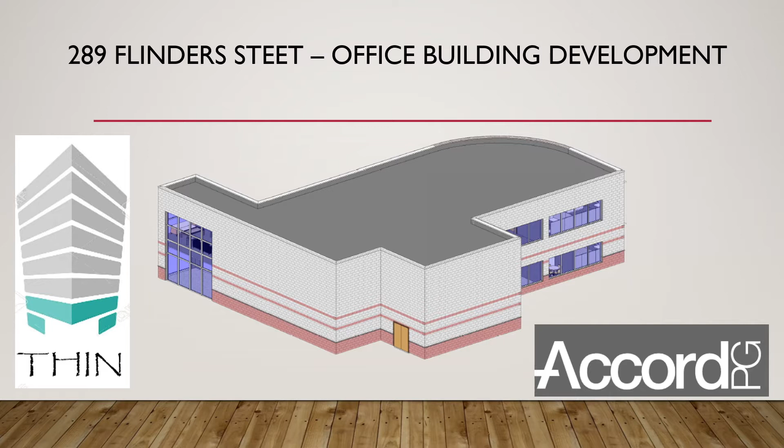Accord Group have purchased a block of 289 Flinders Street, located on the eastern fringe of the Adelaide CBD, and are planning to invest and develop a commercial office building. All existing buildings on site have recently been demolished and are cleared for construction.

Currently, Accord Group have finalised a conceptual drawing for the construction of a two-storey commercial office building, as market trends suggest that Adelaide is shaping up as a strong avenue for commercial investment. There is a great demand for office space for commercial property within Adelaide. Vacancy rates for the prime office market in the Adelaide CBD have been on a steady downward trend since 2016.

There is a feasible business case for Accord Group to develop this commercial office building and lease it to a business to generate profit. Currently, TCL Australia, an engineering company, are looking to expand into Adelaide and are very interested to lease a commercial property off Accord Group.

Project requirements include a fully serviced two-storey commercial office building, a budget of $2.5 million, at least 3 sustainable attributes to be explored, up-to-date as-built information after the completion of construction, and a prefabricated HVAC system.

Through the project's purpose, the project's business case, and the project's requirements, we were able to explore and create a list of project objectives. We believe that the project needs to embody and deliver on these elements and characteristics to fulfill the purpose of why Accord Group wants to develop a commercial office building in the first place.

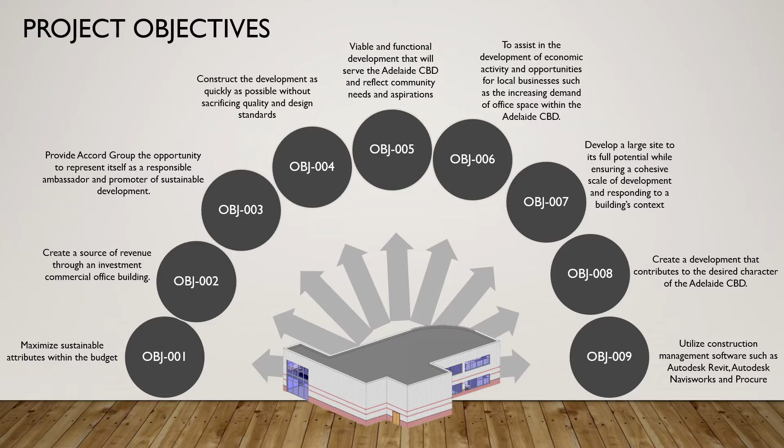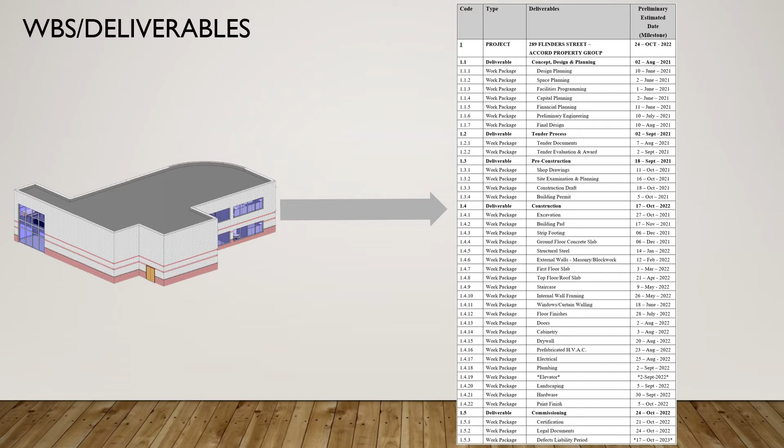In constructions, we're able to define what the project requires and the deliverables that need to be met. This broadly outlines the scope of the project by listing each deliverable and work package with a loosely estimated expected delivery date.

Then we also listed what was excluded from the project scope and listed some assumptions made about the project. Both these elements can help clarify what is and isn't included in the feasibility study and help us identify any risks that the project may endure.

For example, the project scope did not include the excavation of rock and the removal of hazardous materials, and thus the feasibility study did not take these into account. However, we did assume the coronavirus pandemic will have an impact or may have an impact on the project, such as these 3 risks, but again, the project feasibility study did not take these into account.

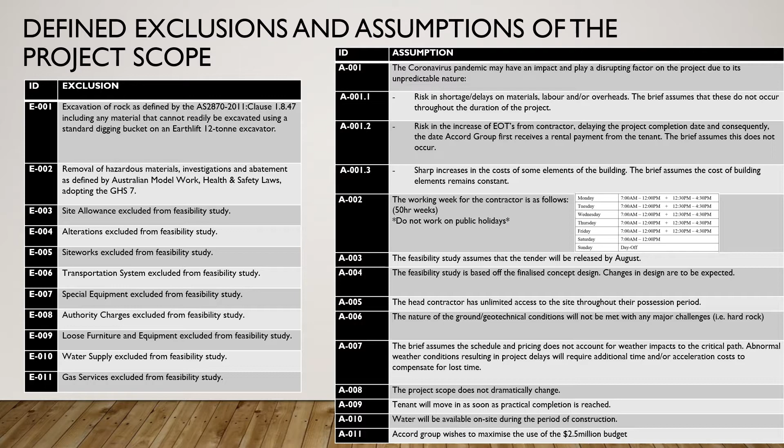We also identified some constraints within the project. The first being budget: we do not want to exceed the $2.5 million that Accord Group has allowed for.

Timing: we'd also like to see the project completed within 1 year of when the head contractor possesses the site. We know there's a client requirement, including prefabricated HVAC system.

Another client requirement was to provide up-to-date asset information for maintenance and operation, and also potential refurbishment in the future. Because of these 2 client requirements, we thought the project must be managed under BIM software to account for these later in the future.

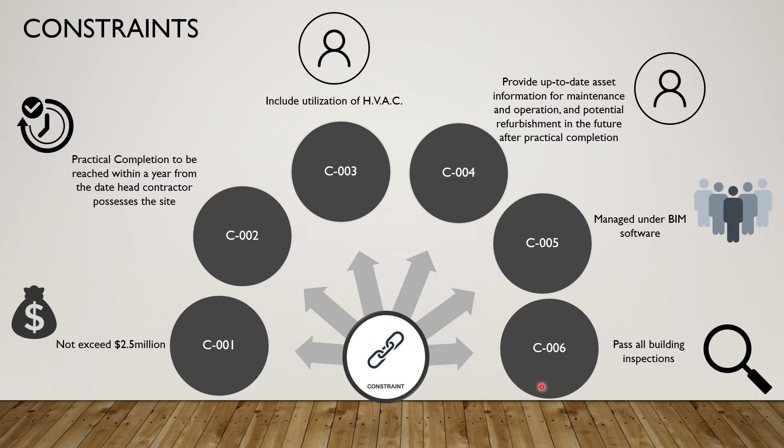From a quality standpoint, we'd like to see all building inspections pass, which will also make sure there's no impact on the program of the project.

It was also important to define the critical success factors for the project. They can act as a guide and clearly set out what the project team needs to strive for to ensure a successful development. An example of one of our critical success factors is well-coordinated design and clear technical specifications.

We require that because if our shop drawings are inaccurate, that's going to impact the cost of the project and also the time of the project.

These critical success factors were developed through our own brainstorming, also through previous lessons learned from similar projects. So office developments that we've previously done, we've identified any lessons learned from these projects and we're able to place them back onto the critical success factors.

It's also important to identify the stakeholders that are related to the project. We obviously have the client and the potential tenant, as well as the principal consultants, who will have a great impact on how the project is set and run.

We also have other primary stakeholders: engineers, architects, and future unknowns currently, but we know they will be there, head contractors, subcontractors, and suppliers.

We also identified secondary stakeholders that will have an indirect impact on the project or will be impacted indirectly by the project.

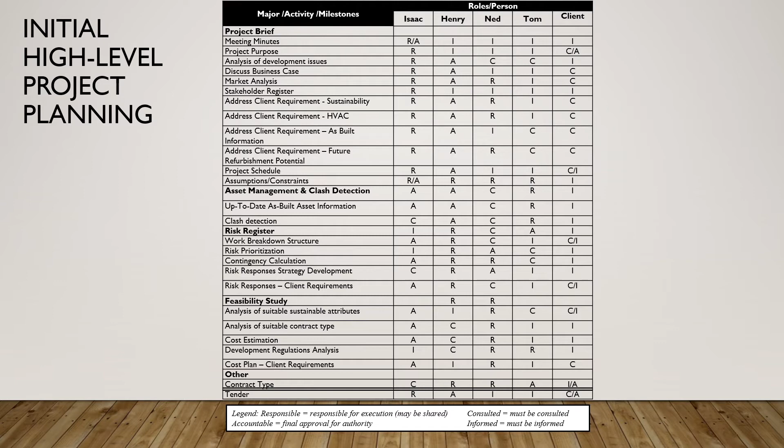Utilising Rawlinson's Australian Construction Handbook Edition 34, the cost plan was developed utilising an elemental cost breakdown rather than a full composite rate. This allows for greater breakdown on industry prices.

Due to the older out-of-date edition of 2016, an elemental cost per square metre rate increase of 1% each year was added to the elemental price. This was to allow for general inflation to 2021, a total of a 4% increase.

CostX was utilised to measure the gross floor area to accurately measure the results found in an initial cost plan. With the primary budget of $2.5 million, Thin Constructions were required to include as-built information, prefabricated HVAC systems, and a minimum of 3 sustainable attributes, which can all be seen in the building cost of the cost plan.

The building cost of the project was valued at $1,936,469. The net project cost was inclusive of the sustainable attributes, including a green lobby, lighting controls, and insulation increases.

Furthermore, the project cost was finalised at the budget of $2.5 million, inclusive of the additional fire requirements under the NCC that were indicated through further investigation. This was inclusive of the lift and also external stairs.

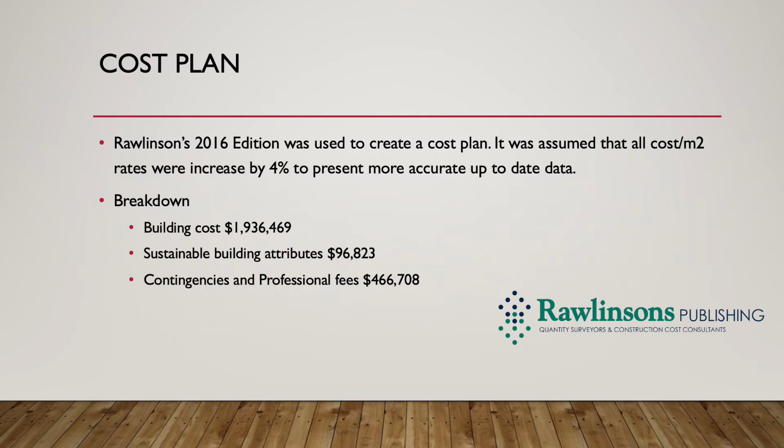The COVID-19 pandemic had a considerable impact on the global market, and for the construction industry identified key elements that would affect the project. Lengthy lead times were identified for varying materials across all commercial construction projects, and the ongoing uncertainty of supply of materials will continuously add a burden to the project.

Furthermore, the pandemic has also identified significant shortages in demand for office buildings themselves, as larger organisations have implemented working from home strategies to try and minimise employee exposure to the virus.

However, on the contrary, as businesses begin to normalise and vaccines are rolled out, the workforce will return to normal and office space demand will again increase.

Market demand has increased for sustainable attributes within the built environment. This is mainly due to climate change and the prompt from organisations to do their part. Currently, the construction industry consumes 40% of the total energy consumption worldwide. Thus, more sustainable attributes and construction methods are desirable within modern-day projects.

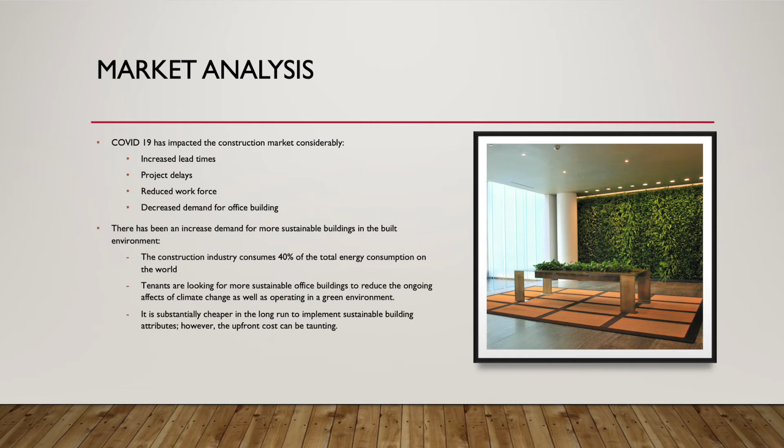The introduction of sustainability within office buildings is seen as desirable for tenants looking to use the space. The implementation of these elements has been identified to increase employee mental health and productivity. Lastly, the upfront cost of sustainable attributes will shortly be paid for through the reduction of running costs throughout the life cycle of the building.

A prefabricated HVAC system will be feasible, however this method will put a huge amount of pressure in adhering to the short project timeline. A prefabricated variable air volume unit has been suggested by local contractor O'Connors, who specialises in mechanical systems. This method will require an out-of-hours Flinders Street shutdown to crane the prefabricated unit into the building. Extensive planning will be required to ensure that the works will adhere to the project timeline.

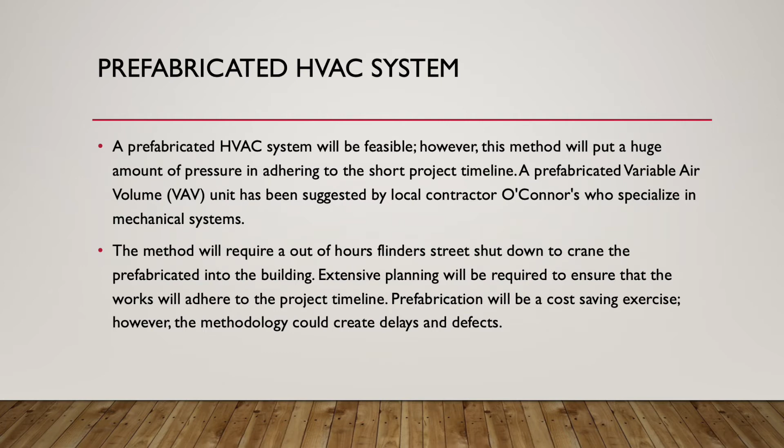Prefabrication will be a cost-saving exercise, however this method could create delays and defects.

Prior to the commencement of any construction project, it is important to ensure that the design is suitable and buildable. To do this, Thin Constructions carried out a thorough clash detection based on the National Construction Code's Building Code of Australia and using Navisworks clash detection.

The NCC assessment was based on 3 key areas, namely fire resistance, access and egress, and health and amenity. These Navisworks clashes were primarily made up of badly coordinated structural and architectural elements in the model.

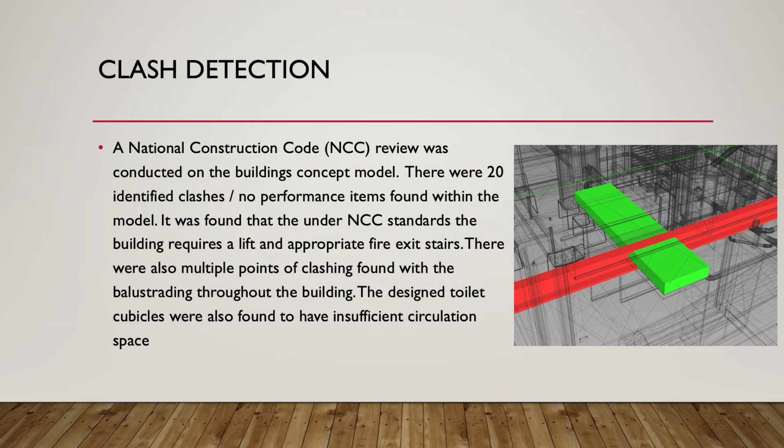The final clash is that of the toilet cubicles. As shown in the provided image, there is only a space of approximately 735 mil between the toilet and the cubicle. Therefore, as per section F2.4E of the BCA in conjunction with AS 1428.1, this is below the minimum space of 900 mil.

Due to the space currently between the cubicle and the wall, expansion of this cubicle may affect the access outside of it. This will then require increasing the overall room size, which would be significant redesign and involve additional pricing. Alternatively, the toilet orientation could be changed to create more space. This clash could have substantial cost effects if not attended to prior to construction.

Carrying out this analysis was essential as it identified a number of key concerns for the project team, further confirming the need to do clash detection during the design and concept stages of all projects.

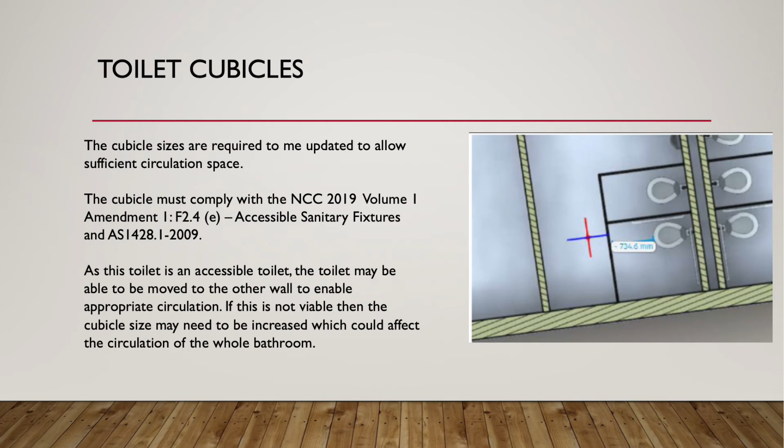Clause D1.3b states that in any Class 5 building, every stairway or ramp serving as a required exit must be fire isolated. This means that due to the internal stair not being fire isolated, 2 additional external stairs are recommended. This will require both an architectural and structural redesign.

However, this will retain the internal aesthetic of the building. This redesign must consider structural elements in the facade to supply and install 2 steel stairways and a concrete landing pad, plus of course a door, a frame and its hardware. This will have a significant cost effect, however should not affect the overall program.

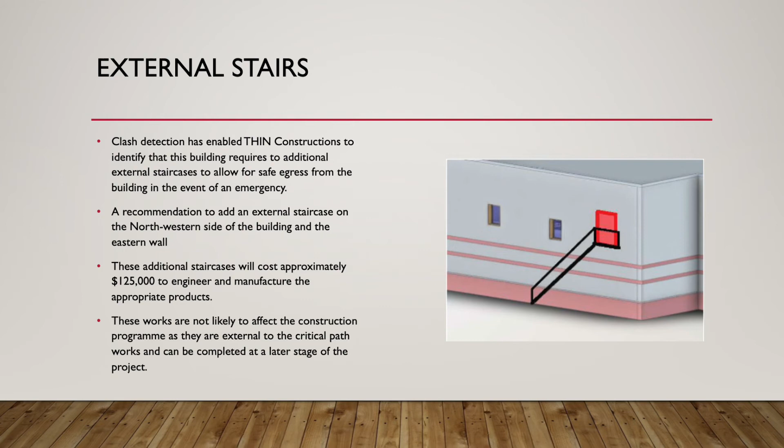As shown in the image, the balustrade on the first level is terminating directly on the aluminium window frame. As this fixing point will need to be structural to ensure the stability of the handrail, this design must be reviewed. The first and most logical option is to remove the horizontal fixing point and have only slab fixings. However, this would require an engineer's approval.

Alternatively, the setup of the handrail could be adjusted to land aligned with the brickwork. This would then require some backing to ensure an adequate fixing behind the plasterboard. Neither of these options will have major cost or time consequences if resolved in the early stages of the project.

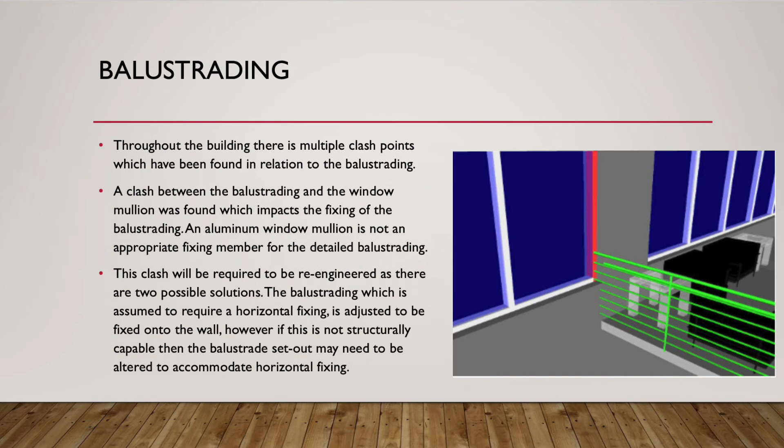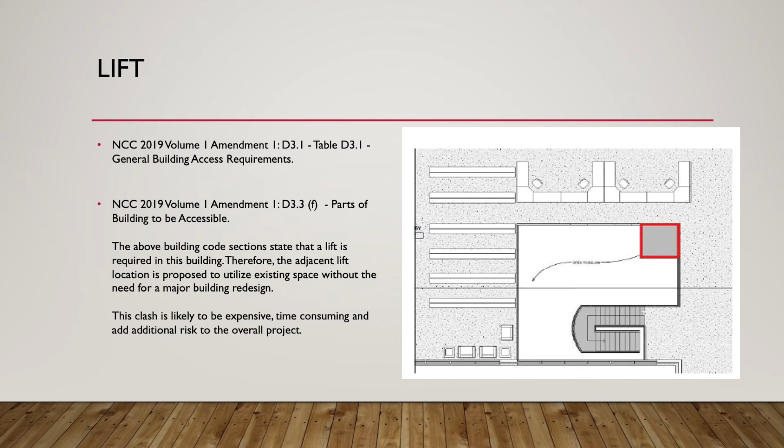Furthermore, Clause D3.3f requires a building with more than 200 square metres on each floor to have a lift. Therefore, it is imperative that a lift is included in this design. This will have significant time and budget effects on the project and must be investigated further.

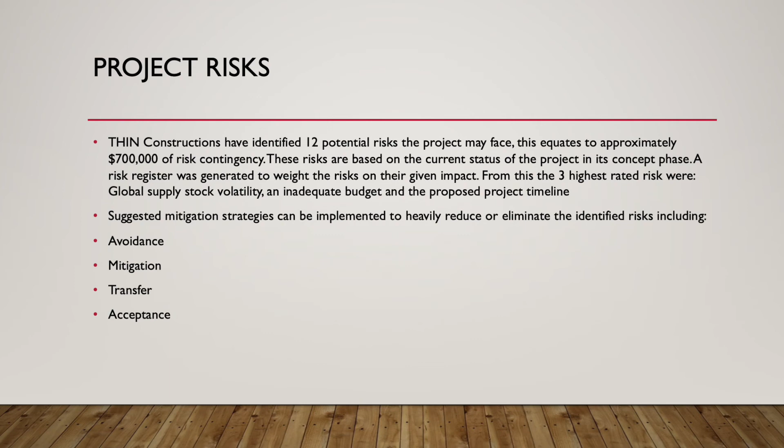Thin Constructions have identified 12 potential risks this project may face. This equates to approximately $700,000 of risk contingency. These risks are based on the current status of the project in its concept phase. A risk register was generated to weight the risks on their given impact. From this, the 3 highest rated risks were global supply stock volatility, an inadequate budget, and the proposed project timeline. Suggested mitigation strategies can be implemented to heavily reduce or eliminate the identified risks, including avoidance, mitigation, transfer, and acceptance.

The current global COVID-19 pandemic which we're in has created many supply and freight shortages across the world. The construction industry is suffering due to the large supply chain issues which products such as timber have. COVID-19 has put considerable barriers up against international freight and imported goods within Australia. There is also a huge demand on products such as timber due to the increase in government spending through grants and home builder handouts encouraging the construction industry to operate to stimulate the economy.

Accord Group's budget is at risk as only $129,000 has been left for contingency for the project. The increase in scope through the inclusion of sustainable features and identification of missing items including the lift and fire escape stairs has taken up a lot of budget. The cost plan was also formulated using 2016 rates with 4% added to them.

In 2016 there was no global pandemic, so it is likely these rates do not account for the increase in trade and product prices due to the pandemic. This is a huge risk for Accord Group who will need to seek cost-saving options throughout the building to adhere to their budget. The risk has been given a risk score of 7.4, and a risk contingency allowance of $187,000 has been allowed for by Thin Constructions.

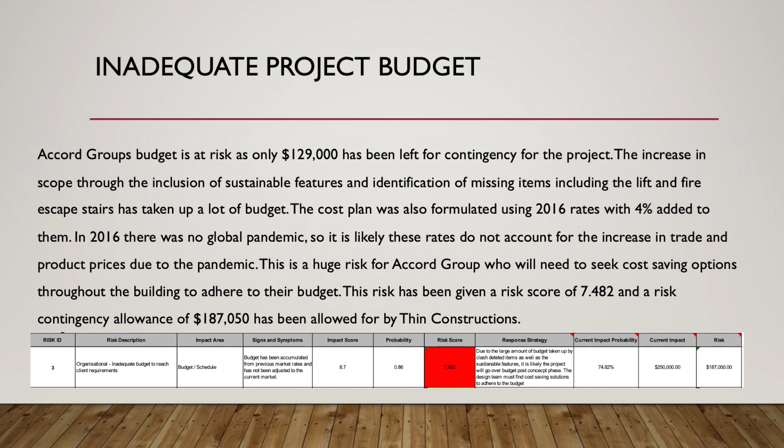The Accord Group have proposed a 1-year project timeline for the construction of 289 Flinders Street, Adelaide. This is not an adequate timeline factoring in the budget and supply constraints which this project is facing. A 1-year timeline will force a 7-day construction program including night works, which will be costly. There are also many restraints on the project program due to the prefabrication of the HVAC system and the volatility in product supply chains due to COVID-19.

The proposed project timeline risk has an impact score of 8.6, a probability rating of 0.83 to generate an overall risk score of 7.1. A response risk strategy is the client will need to allow for additional time to carry out the works at a smaller cost. A 7-day program to complete the project will be very costly and likely cause the program to go over budget. A current impact probability score of 71% has generated a risk contingency amount of just over $57,000.